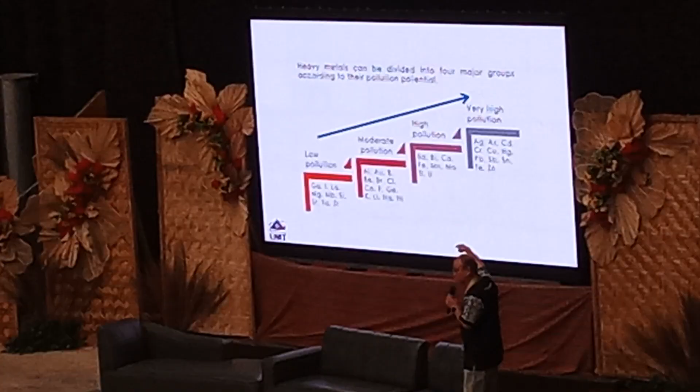Next. So, this is the method that we can divide into several groups. So mostly, scientists will focus on the high pollution and very high pollution metals. Okay? Like arsenic, cadmium, chromium, copper, zinc, mercury. Okay? So you see, zinc is an essential metal, but of course we study it.

Because when we determine the zinc level of the sediment from the water, what we need to know is whether it is above the background value. When it is above the background value, we can say that this area is polluted with zinc. Okay? But of course we have to go for further study, more samples as proof. Okay, next.

So it's a serious pollutant in our natural environment due to their toxicity, persistence, and also biodegradation problems. This metal cannot be destroyed. Once they enter the food chain, the easiest way is uptake by the phytoplankton and then transfer to zooplankton, and lastly they will transfer to humans. This is one cycle.

Okay? Metal input can come from natural sources and anthropogenic sources. Currently, anthropogenic input of metal exceeds the threshold. Why can we make this conclusion? It's a finding because first we need to compare with the background value, the standard. So above the standard, we can say that anthropogenic input already occurred in that area. Next.

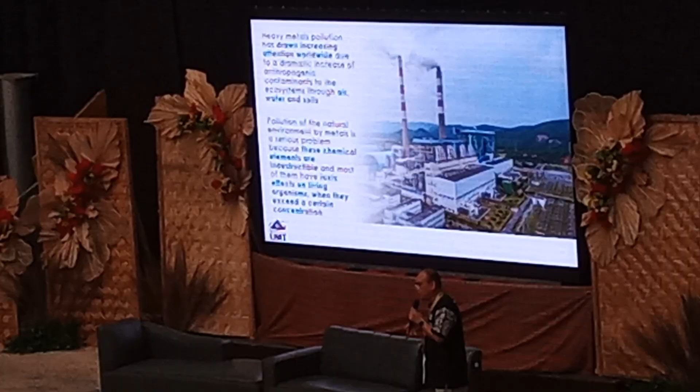So now every country will be concerned about these matters. Due to a dramatic increase of anthropogenic contaminants in the ecosystem, they can enter the aquatic environment via waste from air, water, and also soil. So pollution of the natural environment by metals is a serious problem because these elements are indestructible and most of them have toxic effects on living organisms.

But when they exceed a certain concentration, like just now Fernando talked about nutrients. A certain concentration of nutrient is good for the phytoplankton. But when we have a higher concentration, we get higher growth. Same over, kung todo imong tinailan, maura man sad.

So, like when you see the doctor, he gives you some dose. Okay, this one, only 2 tablets per day. So you cannot take more. If you take more, then it will affect your body system. Okay, next.

So some metals are highly resistant and stay in the environment, becoming concentrated. So you see, when one enters the environment, the first organism to uptake it is the plankton. It transfers to zooplankton, then to fish, then to bigger fish, and then last to the human. So actually, human is a top predator in every environment, in ocean, river, or on the land.

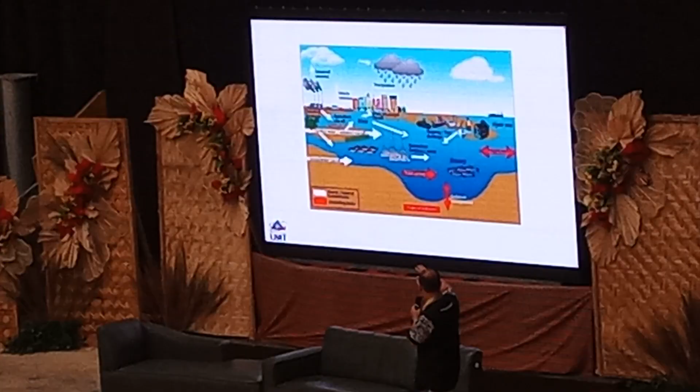So this is a summary of what is the ecosystem. Where does the pollution come from? From the urban runoff, agricultural runoff, from the surface runoff, from the groundwater runoff, okay, from the maricultural activities, then from the shipping. These are some possible sources. Okay, the contact factors like the agricultural sediment change.

So I studied my PhD in France, in the Gulf area. In the Gulf area, there's about 3,000 yachts. So my first hypothesis was that this area is polluted. Okay, when I did my analysis of the organisms and also the sediment, I found that that area is slightly polluted, not very highly polluted. So when it differed from my hypothesis, I had to look back at why it happened.

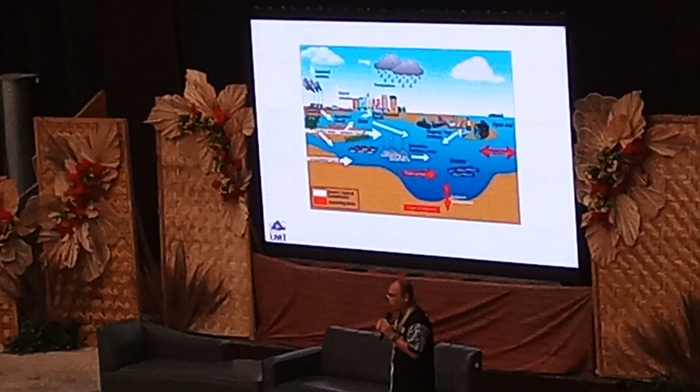So I found that my area is affected by tidal exchange. Because in my study area, there's a two-time tidal exchange. That two-time tidal exchange dilutes the pollutant. And then the second one is tidal current. Because the tidal current is very high, the pollutant does not have enough time to settle down in the sediment. So they are already flushed out to the ocean. Okay, next.

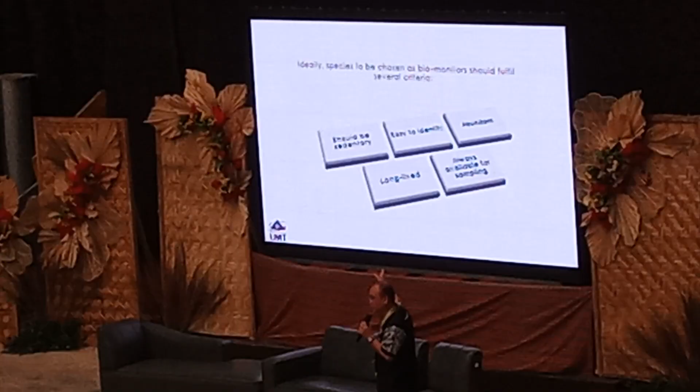Sometimes they study the dry season, wet season, or also the monsoon season. But some organisms during monsoon season are not in that area. Okay. And next. So living organisms can transport pollutants in and out of the body system. So they can keep them in the body, they can expel them from the body.

But now actually we consider that if we consume 1 ppm, we keep 1 ppm in our body system. Okay? So actually we have to think more about how much pollutant is exactly in our body system. If you ask me how many percent, I can say that maybe only 1% of the pollutant stays in our body, the rest 99 is expelled from our body. Okay? This is only an assumption because we have to do more study, tests on mice and so on.

So organisms can take up pollution from water input and from feeding. So different organisms have different types of feeding. Some are filter feeders, and so on. Okay? Next. So the choice of suitable biomonitors should consider the potential source of metals in the biota. If this animal does not contact the sediment, uptake is focused on the water source, meaning that it's good to study the water quality, not the sediment quality. Okay? Next.

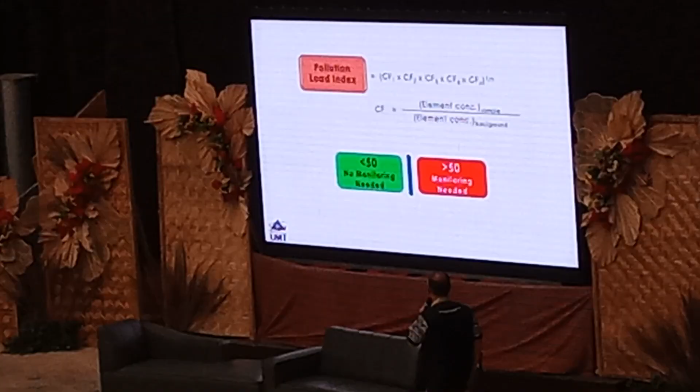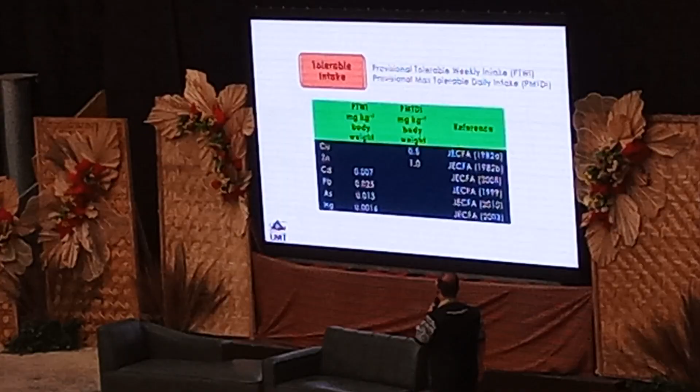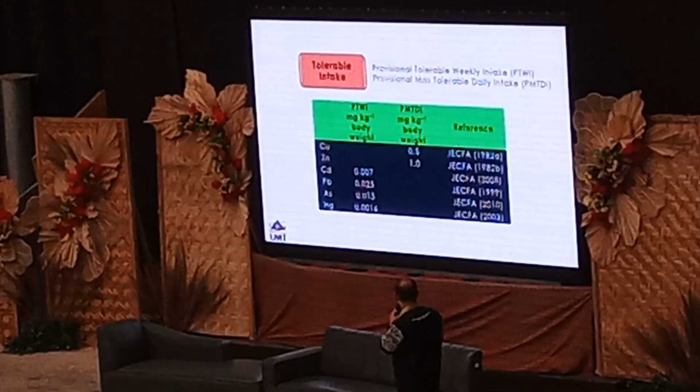Next. So this is the economic thing, so we calculate considering the weekly and also the daily intake. How much you uptake the metals daily or weekly. Okay. So this is a standard value. Normally the body weight we are using is 65 kilogram. So in Malaysia, the average is 65 kilogram. So we use 65 kilogram to calculate.

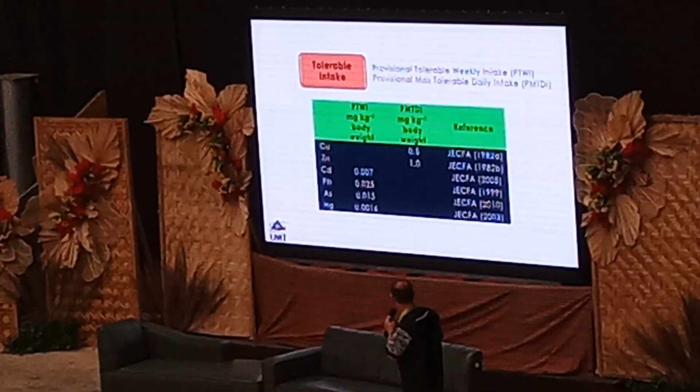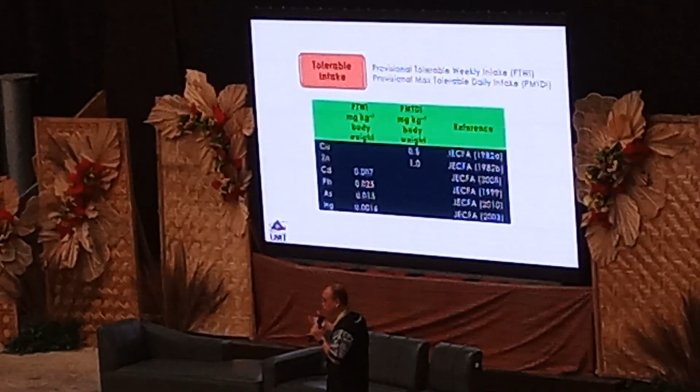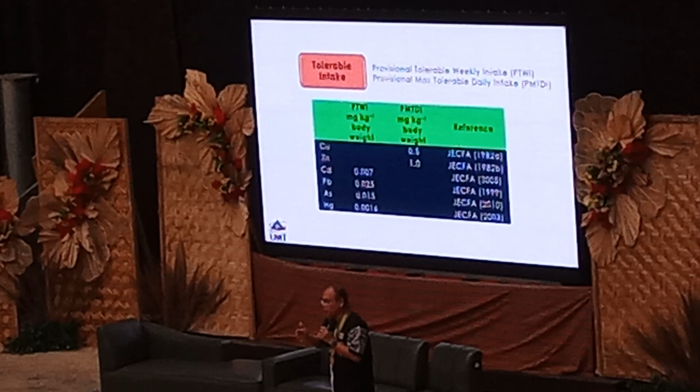Okay. From this data, actually, we can also predict how many oysters we can eat, because when we do the methods we use the soft tissue. And after that, we calculate and divide with the weight. So we can calculate how many individual units for 1 week. Okay, next.

So even areas having low level of activity also have pollutant content in their sediment in the ocean. Okay? So even in the Antarctica area, they also found a lot of types of pollutant. For example, like microplastic, metals, hydrocarbon, pharmaceutical waste. Because why? Because when the pollutant enters the ocean, there's no boundary. So they will follow the current everywhere.